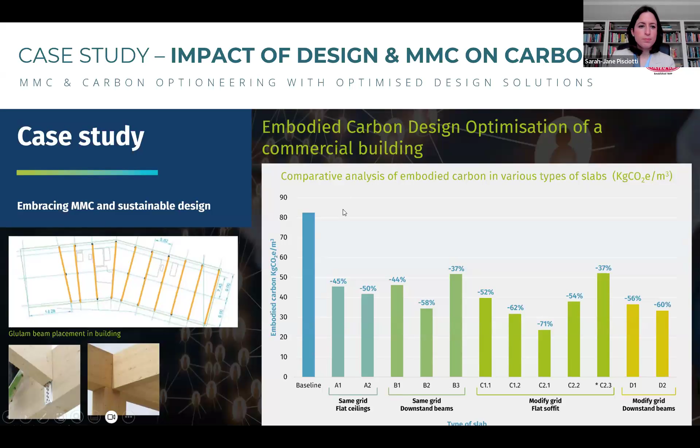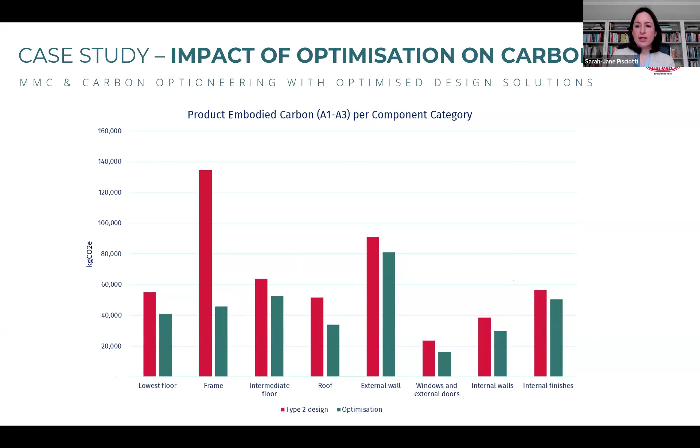So I think there's some interesting cost data coming out around the efficiency of MMC as well. This is an example of a different project where we looked at the embodied carbon against each of the elements. Through procurement alone, we were able to optimize the performance in terms of carbon reduction of each of those elements. So really how we buy and how we specify can have an enormous impact. I think this is why collaboration is so important between the contracting fraternity and the design teams, because we have a lot to bring in terms of knowledge of our supply chains and selection of products and materials that can really help optimize designs.

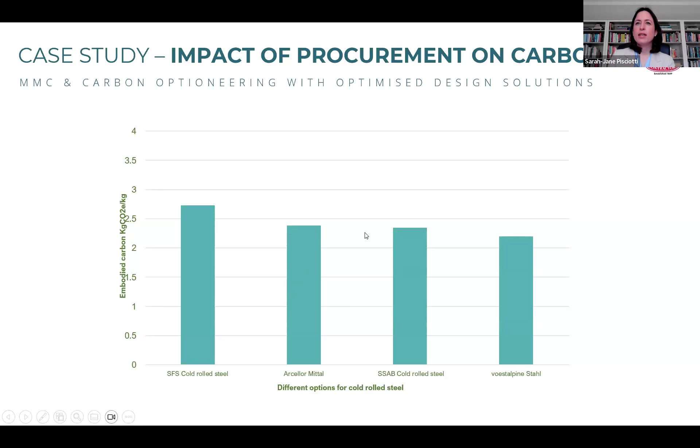This is another example looking at cold rolled steel and how we buy it. Depending on how that steel is made, whether via electric arc or fossil fuels, it can be a dramatic difference. We've more dramatic graphs showing how buying differently can impact on carbon. And just picking one material alone, insulation, we can see what the embodied carbon performance is of various products in the market, and therefore start to dictate our design solutions as a result.

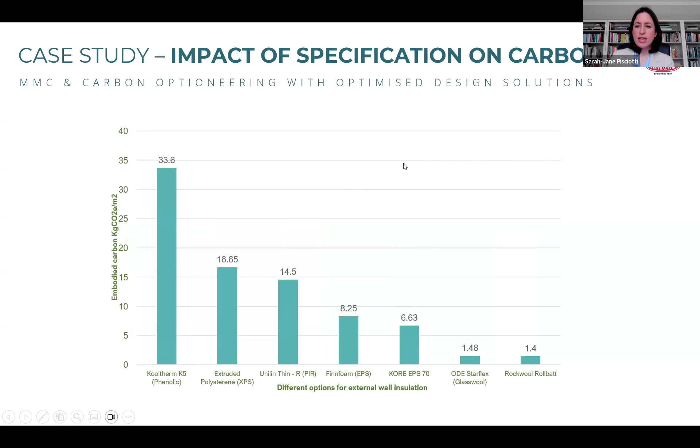A couple of slides left. These are just some snapshots of what we're doing in the wider industry and indeed in our company to try and drive transformation. We're investing heavily in our plant to provide the very latest equipment on our projects, equipped with the next generation of artificial intelligence. Just one example, we've a lot of drive on site around smart sites, smart metering, reducing both cost and carbon and use of electricity, using HVO fuel, and also upgrading our fleet to electric vehicles.

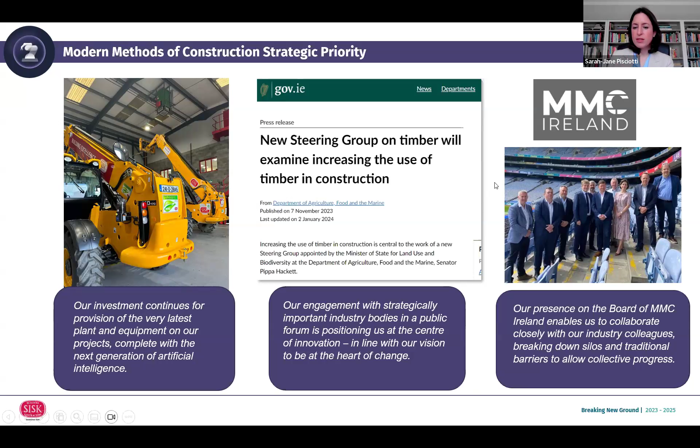The central image shows that we're part of a new steering group led by the Department of Agriculture, Food and the Marine, driving the increased use of timber in construction in Ireland. So that's really, really important for us to be driving that change and opportunity. And lastly, on this slide, as a member of the board of MMC Ireland, we can stay very close to what our industry partners are doing, what we need to do to collaborate with them to drive innovation and break down the silos and barriers that have been traditional in our industry.

Finally, with Construct Innovate, as a member of the Centre Steering Committee, I'm proud to be part of that team that Jamie and Magda and Colin have assembled to really try and understand how we can knowledge share in our industry and drive research and collaboration with academia. In the center of this page is an example where we're collaborating with webinars and specifying sustainable concrete, and our collaboration with Trinity, supported by the grant from Construct Innovate, and indeed our own investment supplementing that. And finally, we're part of the Construct Innovate Timber Working Group and are active in promoting offsite timber methodologies.

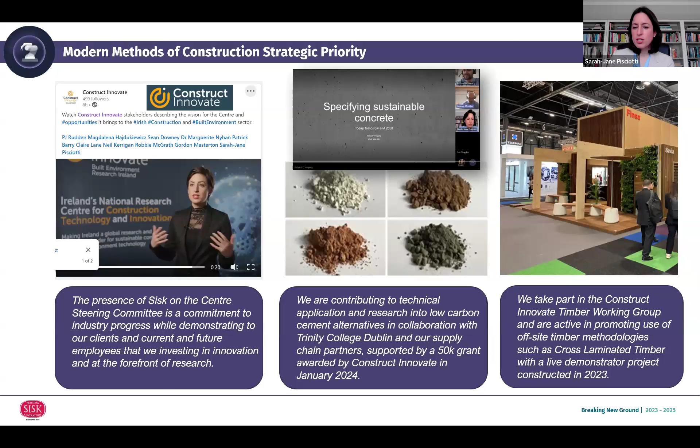So hopefully, Jamie, that's it from me. Thank you so much for your time and attention, and for listening to a very small part of what is our Breaking New Ground strategy at Sisk.

Thank you. Brilliant. Sarah, thanks, Sarah Jane. There's a lot there, and I'm sure lots of questions from the audience coming in. I see them coming in already.

Great to hear about the work going on around MMC, embodied carbon, and that emphasis around collaboration between the design team, the contractors, supply chain, but also the academic community as well. And I know you mentioned a couple of times the €50,000 grant from Construct Innovate.

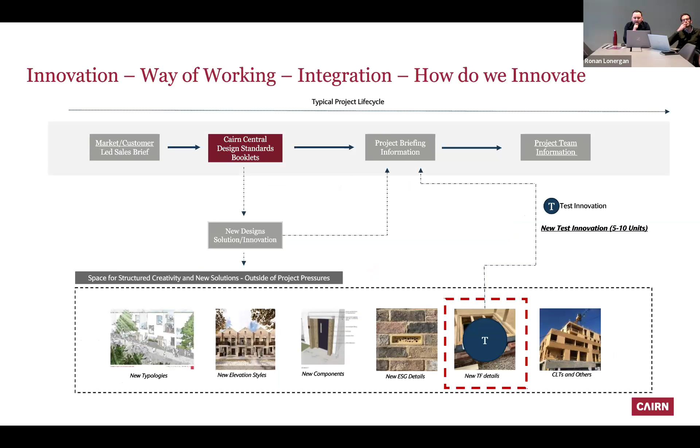Not going to dwell on this too long, but it's really important. Across the top, this slide indicates the typical life cycle of a project. One thing Cairn has identified, and we do quite well, that probably other people haven't started to do yet, is we actually develop things outside of a project, because ultimately projects have deadlines and timeframes, and innovation rarely follows one step after another. It's really key that we've moved that off to one side.

So as and where we've developed new ESG details, new components, new typologies, and when they're primed and ready, then we roll them into a project.

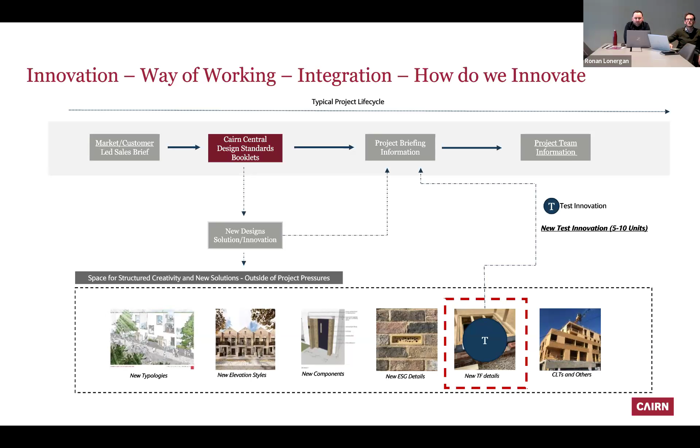So quickly, just to reiterate that partnership approach, a couple of our partners here on the screen. Kingspan key with the multi-unit duplex, we were the first client that used that product, and we actually developed it with them. It was probably back in early 2022. I went to their innovation centre in Kingscourt, County Cavan, a very impressive building, and they showed the genesis of what became that product.

I think we would both agree neither company would have got there on their own. It was very much Cairn plus Kingspan together to help drive something that would really improve the product piece for the market and give back something that is also cost effective and easy to build.

EcoWall is something we've initiated out in Parkside, originating in the UK. It's simply an off-site internal wall panel that gets constructed, and instead of carrying out that work on site, it achieves staggering waste reduction of the order of 80%. So really good win there from an environmental point of view as well.

VR experience - we'll be using this for quality management, and also for some of our customer experiences, just to show them, particularly for houses that are maybe being sold off plan where we don't have a show house built yet. TestFit is an interesting piece of software from America, based on mathematical problem solving solutions for program for housing in particular.

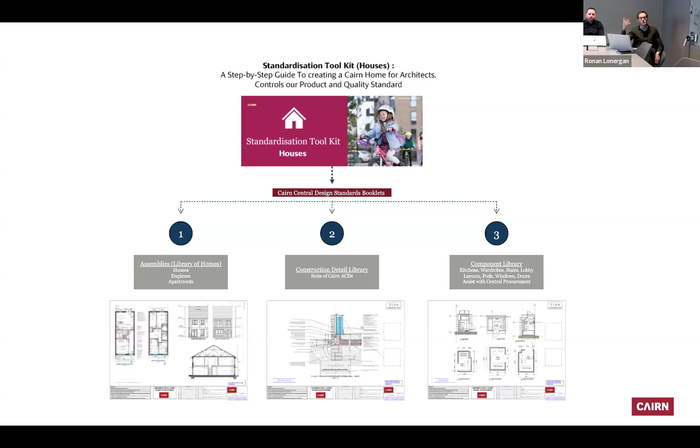The next level down are the construction detail libraries, or the Cairn ACDs, as we sometimes call them - standard details. We've been very prescriptive in these, saying these are what we have found to work, considering building regs, program cost, sustainability, everything else. Then right down to a micro level is the component library, where we've drafted standard components such as pods, balconies, kitchen types, and items like that.

If we go on to the next slide, there's an example of that for one of our standard house types. You can see we're trying to standardize things as much as possible to streamline design, but also procurement and construction. We're getting feedback from our supply chain that we're using these products on each project going forward, which is a massive benefit for streamlining design, procurement, and quality on site. We found them to be very lean from a sustainability perspective, just trying to use less across the board.

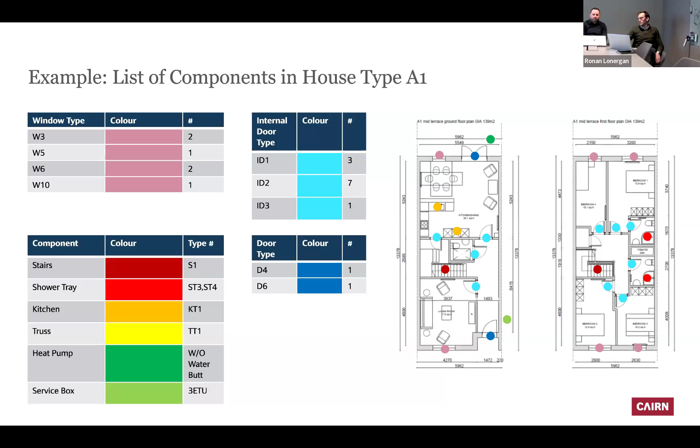So in terms of the different components, again, very prescriptive in terms of typical stair types, even down to shower trays, kitchens, roof trusses. It comes to a point where when a consultant or contractor has worked with us across a few projects, they're almost relaying this back to us - saying this is what you're using here, or why aren't we using this, that, or the other. It's a continual process of trying to make things more efficient for everybody, with the sustainability and efficiency lens on.

That's it from us - again, a bit of a whistle stop tour. One of the proof points worth calling out is the toolkit in particular, and we'd probably chalk a lot of our efficiencies up to how we approach design. We did some research using BCAR information, commencement notices and completions - we build 11 weeks quicker than the industry average, and we hit site in a third of the time. A project might take 60 weeks to hit site in terms of pre-construction, waiting on planning and commencement notice, but it's generally taken us probably 3 months from grant, sometimes even less. That really is chalked up to how we approach design, so we're seeing a substantial amount of efficiencies in it.

Okay, that's what I've taken out, but that's probably it. Thanks very much, Jamie. Thanks, everyone. Brilliant, thanks Ronan, thanks Thomas.

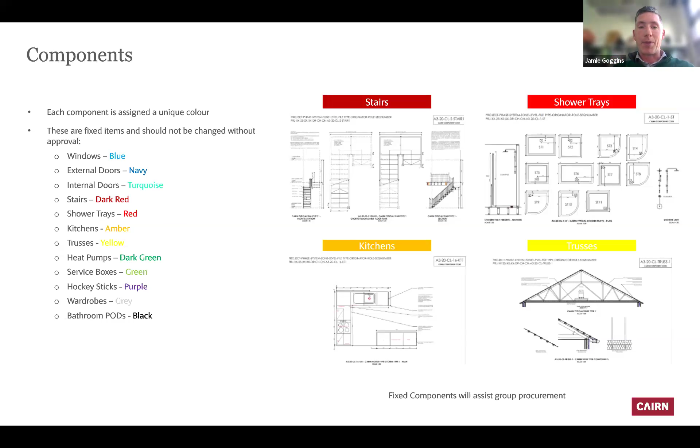That's fantastic, great insight into how Cairn assesses innovative ideas and uses that scorecard to decide to go forward. And how you have a library that's evolving, where you're learning and improving, but at least people know where you stand and what you're looking for as a company. You're showcasing some of the impacts of that in terms of getting things built quicker and getting to site quicker. Any questions, pop them into the Q&A function at the bottom, and the guys will answer them there or we'll deal with them at the end of the presentation.

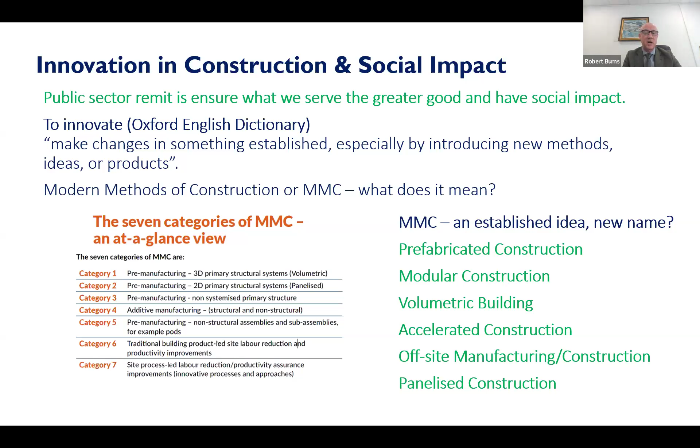And that's something we'll be very conscious of in Monaghan. Next slide, please.

So maybe bringing it down to something tangible, an example to explain some of the things we've been doing in Monaghan County Council. It's not new, modern methods of construction - it's been around a long time. Timber frame is with us since the 90s, and the 2000s got better in terms of reliability, standards, quality. But we have been dealing with some form of accelerated way of providing housing for a time.

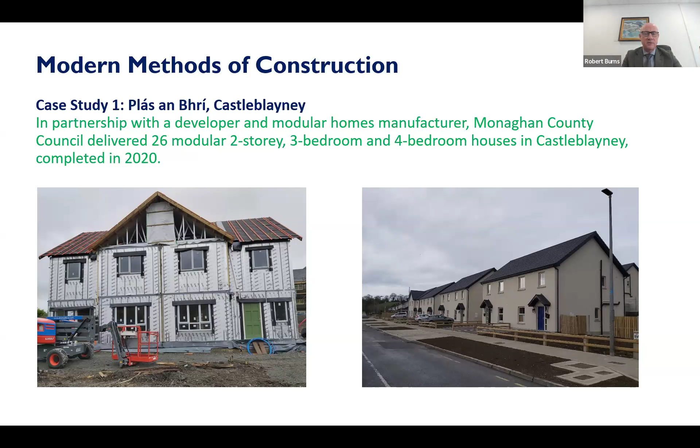And this is just a case study of an estate in Castleblayney, where we worked in partnership with a developer and a modular homes manufacturer to complete 26 two-story, three-bedroom, four-bedroom houses. This was done in 2020, so we're doing this during COVID and finishing off on it. You can see it's using light gauge steel and a volumetric type of construction, modular units. The next few slides will go through it in a bit more detail.

So again, this would be taken as a given that we are getting excellent quality control in the factory conditions. But the feedback we were getting is that if you're getting that excellent quality, you have a consequent reduction in the number of snags and defects, and that's what our experience was. The construction period was really exceptional, I have to say that, and I use that word deliberately - there are not many 26-unit developments being completed in 9 months, and that was completed to a very high standard.

So each house was comprised of 6 volumetric modules and delivered by large goods vehicles and craned into place. I do refer to the equipment and the handling, because that's actually an important part of trying to accelerate modern methods of construction - looking at how materials get handled and moved, because you're looking at bulky, quite heavy materials having to move from a factory environment to a less controlled construction site. And if there's one thing we're very good at in Monaghan, it's materials handling, and that has become a feature of product development within some of the companies based in Monaghan.

And then the external blockwork, render, and roof covering was completed on site. Next slide, please.

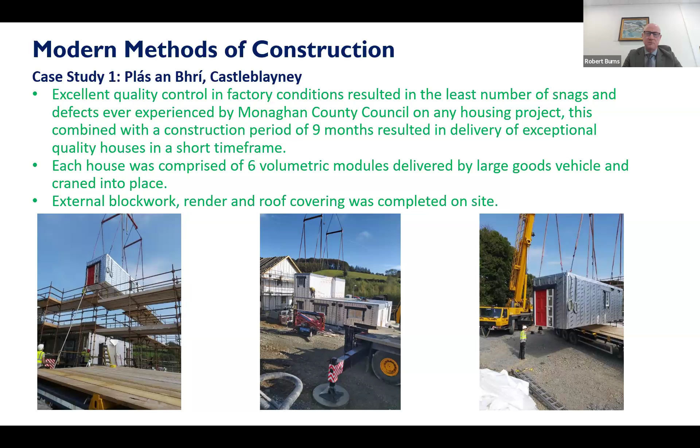And that's just if you have completed units. Again, this is really interesting, because when I bring councillors out to see this, or members of the public or others interested, and explain the idea of modular, in their mind they think modular is something less - that you can tell the difference between modular construction and traditional construction, that somehow it's a lower grade, a yellow packed version of housing. I think these images and the reality of looking at this site shows that modern methods of construction, modular construction, delivers high quality housing that may be indistinguishable from traditional build, and you've got all the other advantages. Next slide.

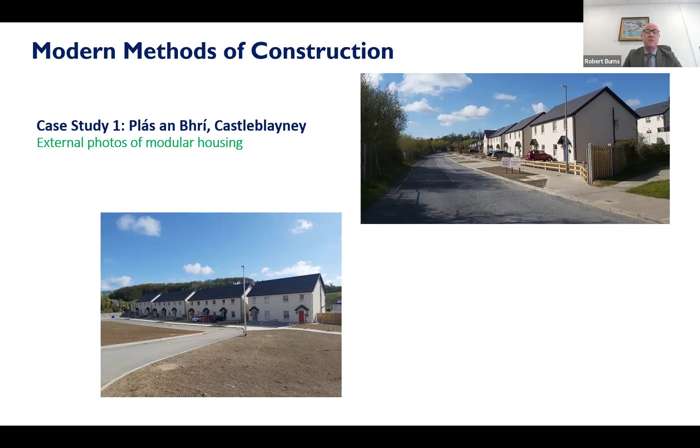This is just some images of the internal, which is nothing unusual, but the caveat here is that all the fixtures, fittings, and finishes were completed in the factory. So these units were delivered on site, and that's really where the extra value is coming in terms of shortening the time frame and reducing costs. But that 9-month time frame was probably only possible because a lot of the internal work was done in a controlled factory environment and shipped to site.

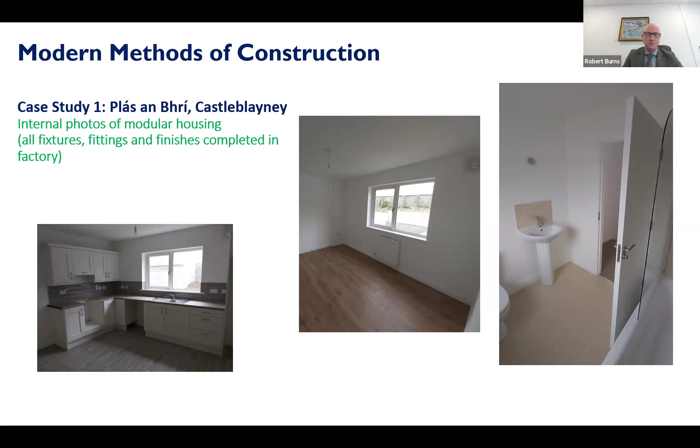The second case study is probably MMC 1.0, the very early versions of modular construction, if you like, or accelerated delivery, using timber frames. This is a project where we worked with the architects, the designers, and the contractors, and that was really important, that this was very much a collaborative effort.

Another feature we had to deal with in Monaghan was the prevalence of derelict, unfinished estates. We had 40 unfinished estates in Monaghan. Thankfully, we were nearly at the end of them, and through Monaghan's efforts, 38 of them have been brought back into use. But that has been the state essentially dealing with what was an overhang from private sector investment, or misguided private sector investment, in the 2000s. So the state often has to come in and deal with these very difficult sites because no one else will. This is where the social impact really matters, because leaving derelict sites is very harmful, very detrimental to communities, as well as preventing the housing being in place.

Just on the total budget, we had to finish off the 4 derelict houses and then build 28 new houses. And then we chose timber frame as the form of construction within this.

I'll come to it later on, but it's very much an established form of construction in Monaghan. Some of the market leaders in timber frame construction are from Monaghan. My understanding is that between 30 and 40% of timber frame panelized construction is manufactured in Monaghan alone, and a much higher proportion is manufactured in the northeast between Cavan and Louth. So it's very much a centre of excellence, if you like, around modern methods of construction, modular construction.

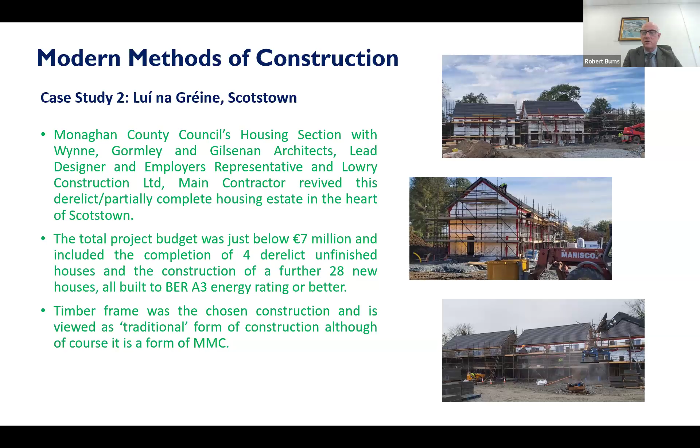Again, that's just a list of things, and I'm going to leave that. Hopefully the slides will be sent around, but sometimes it helps to get under the bonnet of these things and understand what's actually happening, the sequence of events.

Again, very much a traditional form, not controversial at all. But when this started out in the late 90s, 2000s, there were huge difficulties around timber frame construction, almost because of the difficulties in assembling these units in a very safe and quality-oriented way on site. It almost sounded the death knell for timber frame, and there was nothing wrong with the processes.

We should be thankful that those standards got put in place. There was uniformity and consistency, and it meant that this, which is a very sustainable, effective, and quick form of construction, has really flourished, and perhaps is coming into its own if we add the timber frame now to panelized volumetric construction. I think there's great potential there.

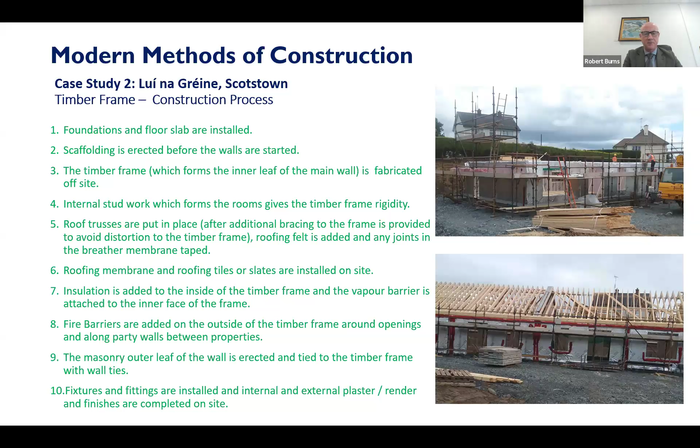We can see the advantages of timber frame construction - you could say it's the advantages of MMC - but I'll just touch on a few things. This whole issue of site labor is fundamental. Anyone who goes out on a site or listens to contractors, this is what you're hearing, and there's not much prospect of those wet trades coming back again, the plasterers and block layers. So we have a different future, and how we respond to that will be critical in terms of how we provide housing. A lot of other areas around efficiency, facilitating follow-on trades, the whole area of circular economy, managing resources, managing waste, is critical.

Again, this is obviously using controlled environments, manufacturing processes which rely on agile and lean methods of manufacturing. We're driving down waste and maximizing the use of resources. And again, some of the other benefits, probably not as well known, is that if you can reduce the amount of on-site construction and ad hoc type activity and reduce your time on site, you reduce your exposure in terms of health and safety and liability, and indeed to inclement weather as well, if you can time it in such a way.

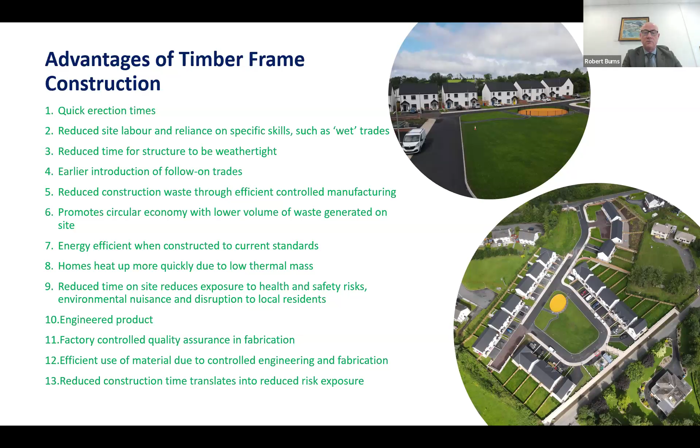So what are we doing in Monaghan County Council to try and encourage the use of modern methods of construction? We link in and tie in with our architects who are very active in the county, and we try and work with them around the projects we have coming up.

We're really focusing on things like, well, we can go into a greenfield site and do standard construction, because MMC, the standard traditional form using timber frame, is really suited to something that's 15 to 30 units per hectare. Once you go past that it becomes more complex, you're looking for more density, and when you've got height as well, you're definitely moving more into that volumetric space.

But we're really interested in how we can deal with regeneration, brownfield sites and infill, and we are challenging architects to come up with solutions that use the best principles of MMC but allow us a bespoke solution within a town centre location. That's a challenge - in some ways it's a contradiction, but that's what we're asking our consultants to do.

We encourage early consultation between designers and manufacturers, and always have meetings where possible. We would bring manufacturers out onto site to look at it at an early stage, even if we didn't have architects in place, because we wanted to know their views - maybe they've done similar work, maybe they can help solve these problems with us. It's a collaborative approach.

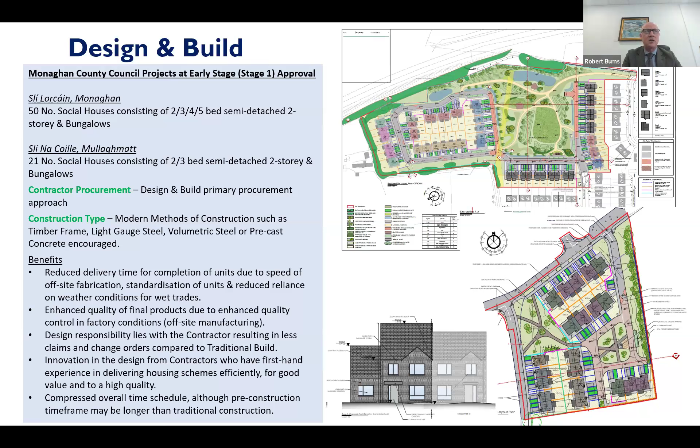I'll try and go through these quickly, and it's not just to focus on housing, because we believe that regeneration is actually one of the most innovative processes we're involved in, and it's a key part of what we're doing. All of you know the challenges we have in our towns, villages, and cities in Ireland—old buildings, derelict buildings, an old purpose that can't be used right now or in the future. So we have to reimagine the spaces and the buildings.

Here's just an example of what we're doing in Monaghan town. A really exciting development, our new Peace Campus, a 70 to 80 million euro project on the site of an old machinery yard in Monaghan town. Think about the positive impact that's going to have for the town. Another life for that site, repurposing—and that, in my way, is really what innovation is about, that renewal.

Next slide. Again, this is a project we're extremely proud of. I think it's been nominated for the IC Awards, one that Broomfield Construction have put forward. This was an old derelict former gate lodge at Lough Muckno Estate in Castleblayney, and that's been transformed—refurbished and extended—to become a state-of-the-art library for Castleblayney. And that is innovation in truth.

It's not just about the processes and the construction. It's saying that building had an old use, it's not going to be used for that anymore—how do we bring it back to life? How do we extend that? And how do we have that social impact?